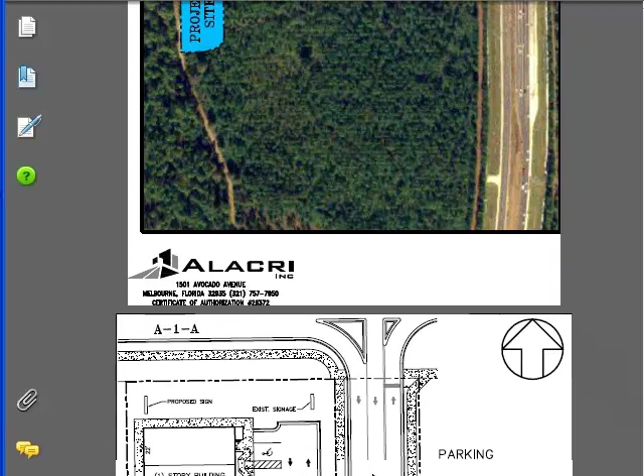The ones you do don't need to be as formal as this. You don't need a nice cover picture like I'm showing here, but you want to make sure you have at least all the sections that we have. I had a cover with an aerial of the site, and then I usually put any concept plans we might do right up front.

This is actually an out parcel of a shopping center, and this client, we have several footprints that we use for the drive-through restaurant they do. Generally, depending on the size of the parcel, we either do a standalone restaurant, or try to combine it with some other possible retail commercial.

This site was pretty narrow. We did several iterations and finally came up with two separate buildings, with the main road here and the entrance into the shopping center and into the parcel. We ended up having about 3,900 square feet in here, and then the restaurant in the back. The road comes around here, and there was another access point into the site that we're not actually going to use if it worked out. But this was our initial concept plan.

Everything laid out here is based on all of the setbacks, landscaping requirements, parking requirements. As you can see, I've got parking requirements here based on the restaurant, based on the square footage, making sure we meet what's required by the jurisdiction.

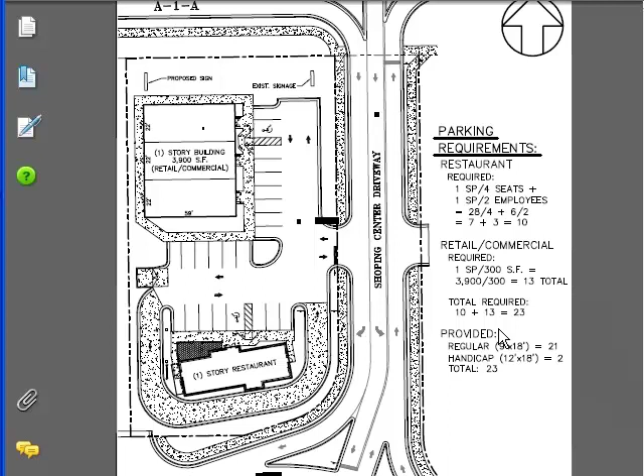Then what we normally do is put any major issues that are still outstanding in the report. Generally, the reports evolve over time. You'll do an initial one, get as much information as you can, and list a bunch of areas where you need follow-up, and we tend to put those in the front of our reports. As we go through and get more information, we revise them and talk about the different issues as we go on.

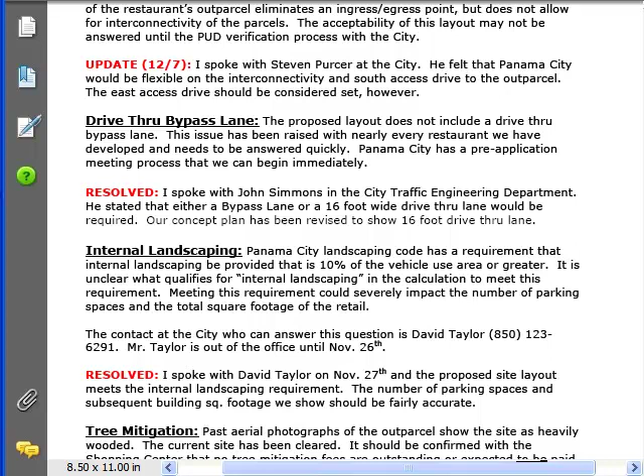You can see if the issue gets resolved, we put in a note here, resolved. That way, if someone's picking this up and hasn't thought about this project for a while, which often happens with developers, they can get back up to speed quickly on what the major issues are. I won't go through too much detail on those.

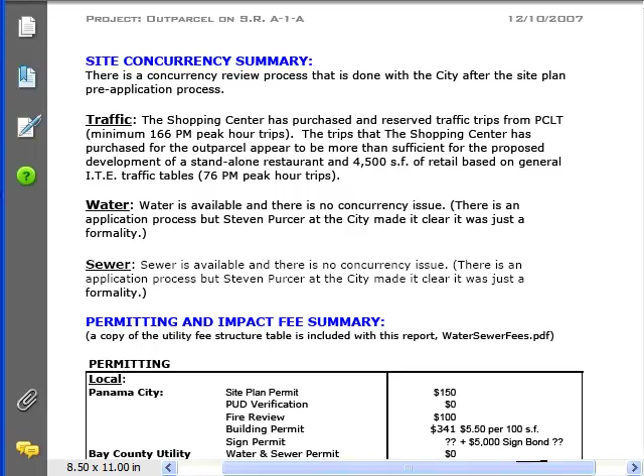Next, we tend to put concurrency issues, but obviously if you want to do it differently for your reports, go right ahead. This is generally what the developers we work with like to see, so we put that right up front because those can be the major issues that can really stop a project before it ever gets started.

We explain those, and we put in our permitting and impact fee summaries from what we found out through the process, what it's going to cost just to get through the process, and what the actual impact fees are. They can go ahead and put those into their pro formas.

Then we go down and do our planning and zoning information. When you start looking at a piece of property, you'll end up having lots and lots of information, and it's really nice to have one source that you can go to get most of it. So we end up cutting and pasting a lot of stuff right into this report, and it generally helps.

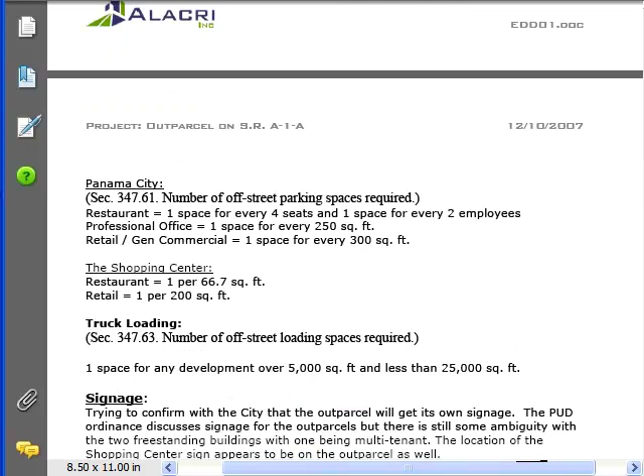We end up using these a lot as we go through the project because you just know it's there and you look here first. So we'll put setbacks information, landscaping requirements, parking requirements right out of the code or whatever the jurisdiction requires or oversees. We just cut and paste the stuff we need for our design, and we have it in one place.

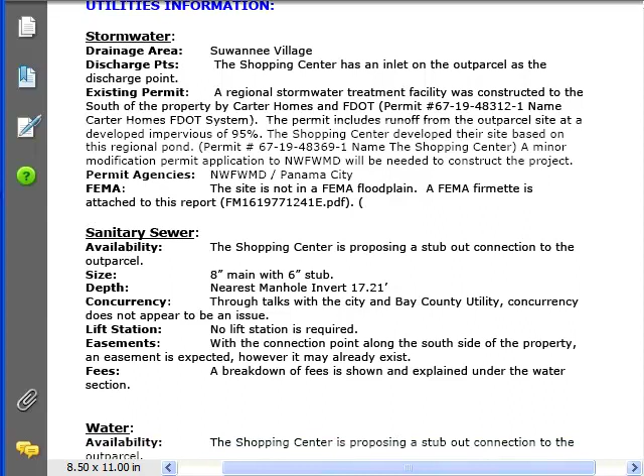We do the same thing with our utilities. We talk about the stormwater issues, who's the jurisdiction. This particular site, the stormwater was taken care of, not necessarily by the shopping center, but by an actual regional stormwater facility behind it that the shopping center was already permitted into, and we explain that there, so everybody's up to speed quickly. Same with sanitary and water - it's all in there. Access information, this is shopping center, we talk about the driveways, ingress, egress issues that may be there.

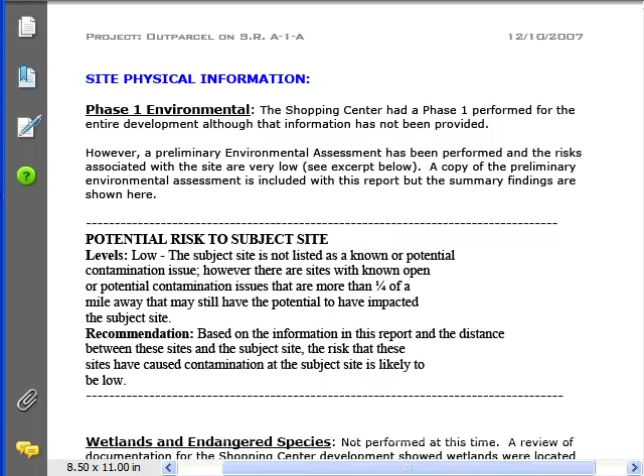And then we go through right into the site physical information, any phase 1 information we might have, any wetlands or endangered species, any geotechnical, and we have subsequent data printouts that we usually include in the back of the report.

One thing you'll notice in this report that I didn't show is a cost estimate. That's because of the client here - he's very familiar with the cost to develop these sites, and for this initial run he didn't ask us to do a cost estimate. But normally once you get a concept plan together, the next thing to do is get some initial costs going, and we'd normally include that in the report.

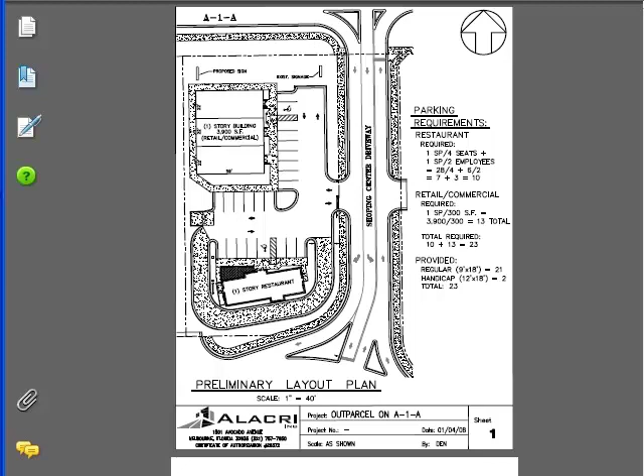So that's an actual case study, an actual site evaluation that we did for a client, and hopefully it helps you with your projects in the future. Thanks.